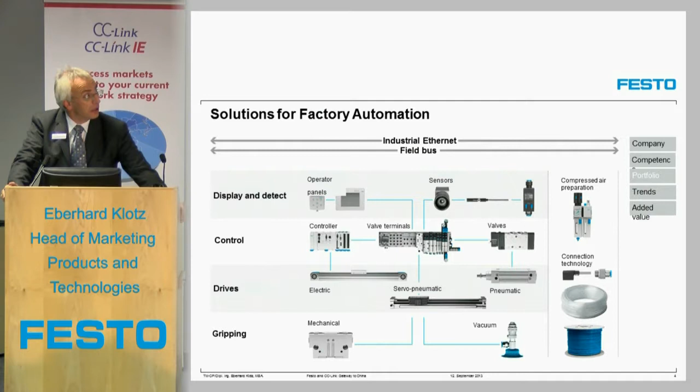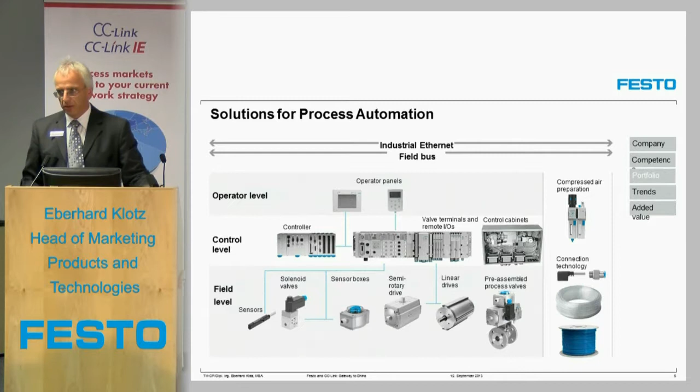This we do for factory automation, and since a couple of years we also establish this know-how for process automation. Then you have different sensors, you have different actuators in the field, of course, but the control equipment is similar at least, and in this case we also provide full cabinet solutions, for example, to our customers. This is the business environment of Festo of today.

I already mentioned we are a family-owned company, and if you are a family-owned company, some things are similar, some things can be different. One thing that is different is that a family-owned company has the capability to engage himself in a long-term perspective.

I come back to Lutz and his presentation, for Chinese people, it is interesting, a cooperation, a long-term oriented perspective in doing business with somebody you trust. You need time for developing trust, and therefore this being independent from shareholder value each quarter helps us to generate these relations with our customers, and it helps us also to do things different in marketing, for example in branding. We will see that later on.

You can catch that Festo is busy since 1925. We started the automation business in the 50s. We already started doing our first national and international companies those days. And today we are really the largest company in offering these mechatronic motion solution systems.

Now, how does the knowledge come to the customer, to the new markets? Of course, there are some things traditional, like trade fairs. We have info shows. We do presentations and workshops with the customers. We have several trucks and minivans where we go to the customer site and show them the solutions and try to pass on our know-how. So this is the part which might be similar in your countries and companies as well.

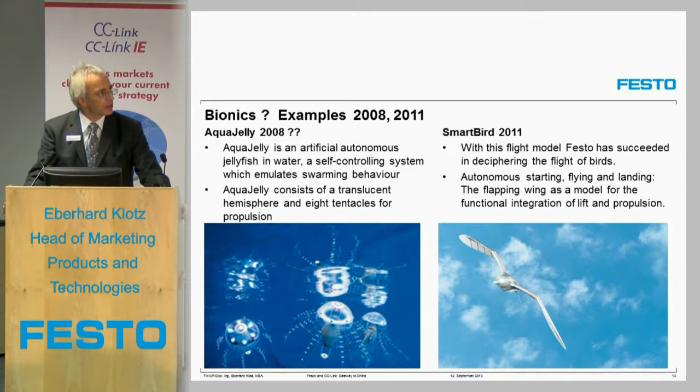A few years later with SmartBird, we tried to decipher the bird's flight. It was always a big obstacle to humans for over 100 years to get these wings moving and flapping so that it can really fly autonomously. It was always a mechanical problem. And we'd been able to analyze that and to solve that.

And then it was the appearance of the first autonomous bird robot flying. And I can show you a few things in one of the films, just to give you a little bit of an impression for those who have not seen it on our homepage so far or at one of the exhibitions.

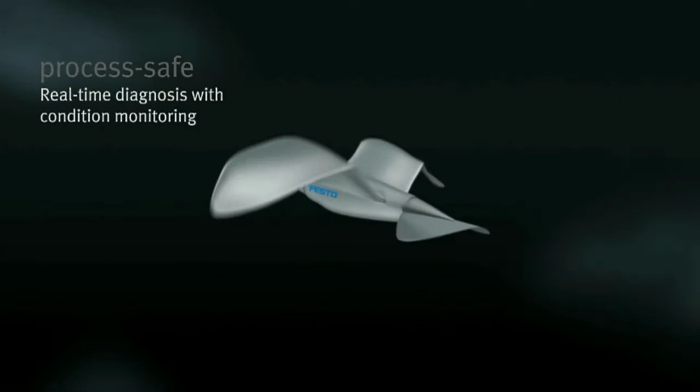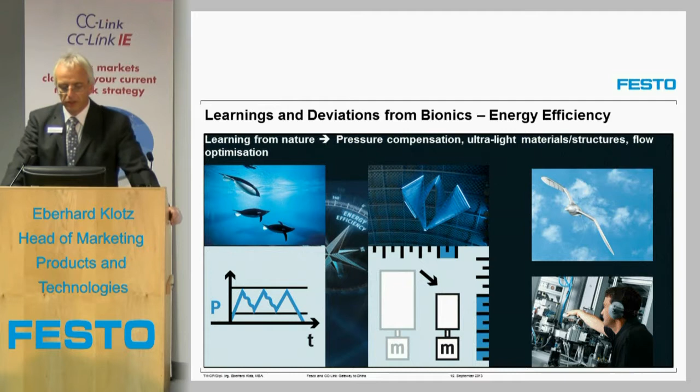Now the question is, after all the PR show outside, what are the learning lessons from nature in this case? I want to give you a few examples. I think energy efficiency is the most important headline overall, because saving weight, coming to lightweight structures, is important as soon as you want to have a flying model somewhere.

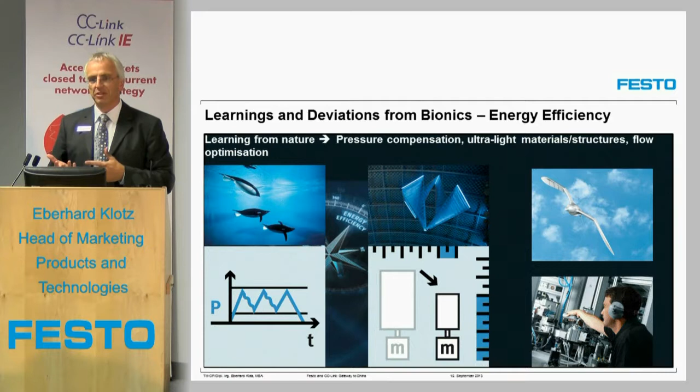But there are more learnings we can take from nature. For example, if fish or penguins go up and down inside the water, you need pressure compensation to balance 500 meters, 1000 meters, or even more in depth. This pressure compensation relates to our core business in pneumatics. If you want to build pressure regulating valves, you can take the same knowledge, the same precision mechanisms for regulators, and bring this into the products.

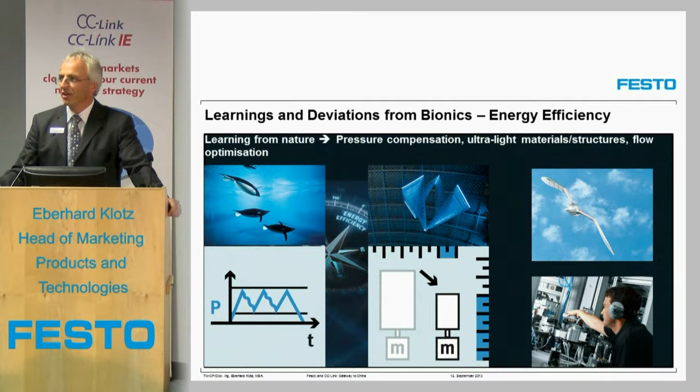The weight saving we already mentioned. If you build handling systems, you need energy to move them around. If you save weight there, it saves energy to the end users over the operating time of their handling systems. Flow optimization was really strongly needed with SmartBird to optimize the wings, bringing overall efficiency from beginning 30% to over 85% with the wing structure. We use the same knowledge to optimize valves inside. You don't see that from the outside, but from the inside I can show you later on.

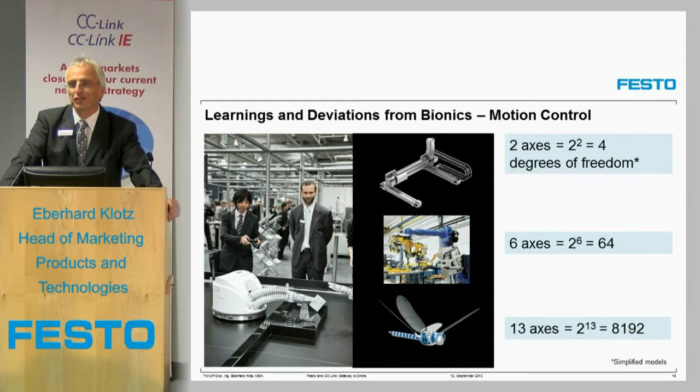I already mentioned the Dragonfly. If you take a typical handling system, an XY gantry, you have a maximum of 4 degrees of freedom, just as an easy formula to make it clear. If you take a robot with 6 axes, you already have to manage 64 potential sources of movement and make sure there's no conflict in the movement. The Dragonfly has 13 axes or motors inside, so you have to manage above 8,000, which gives you an indication of how complex motion control tasks in bionics, in nature, are, and how they're managed in a very professional way, and how complicated it is to build that into a chip or any PCB board to get that managed. It was also partly hardware related, similar to your approach inside the chip, and it's not all done by software.

Here you see the learnings from flow control. We have a virtual reality laboratory in our headquarters, and there we optimize the SmartBird, but we also optimize standard valves. We are able, for example, to improve flow rates of valves, even if they fit a standardized outside format, by up to 30%.

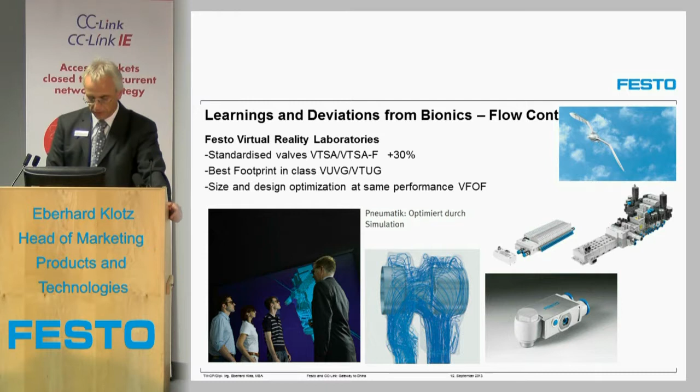Summarizing that, the learning steps usually are: take an example from nature, muscles, fins, or trunks. Try to figure out the basic technical principle behind it, and then try to adapt it, either to a bionic model or to an industrial application. The time delay between the first idea, the first derivation from nature, and an industrial product is very different.

From the bird's flight, I think we will not see any objects flying through the fabrication hall tomorrow, that early. But other things like the elephant trunk or these soft grippers, these fin grippers, are already standard products, the grippers in the Festo range. So in some areas we learn within 2 or 3 years and get that to an industrial product. In others, it's really a very early study program, and we still do not know when it applies in industrial reality. But anyway, it's fascinating.

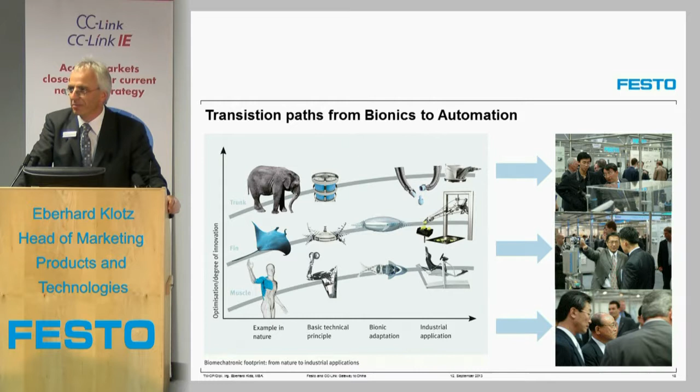And you will see it's fascinating in Europe, and it's also fascinating people in China. This is the message of the day. We have a second area where we invest money, and this is the so-called future concepts. Future concepts are much more related to technical needs. They use more everyday technical products inside, but they all have a vision we want to share. Over the last 2 years we made several very interesting projects.

The first one, on the upper right corner, is the so-called ExoHand. This is a glove with a robot hand on it, and you can wear this glove and control a robot. You can have interaction with the robot, and there's force feedback inside, so if the robot grips something, you feel in your hand, in your glove, the force of the robot. And if it touches a glass or a raw egg, you can say, okay, stop, stop, stop, it will break soon, it's my experience. The robot doesn't know, but it can learn together with you, and you transfer your knowledge just by this interaction of force feedback.

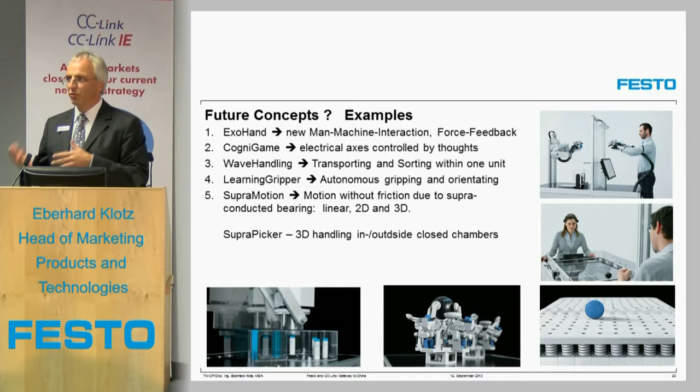One year later, we had the so-called CogniGame. This was the first time we used a brain-computer interface to control an electrical axis and to move it left and right.

An I/O platform which integrated control technology, in this case CODESYS, can be interlinked to any industrial protocol, for example CC-Link. Then you have one platform to operate electrical axis actuators, pneumatic or servo-pneumatic actuators, fluid muscles, and many others, to attach camera systems and vision systems, to modify complex automation tasks of today, but also future scenarios of tomorrow.

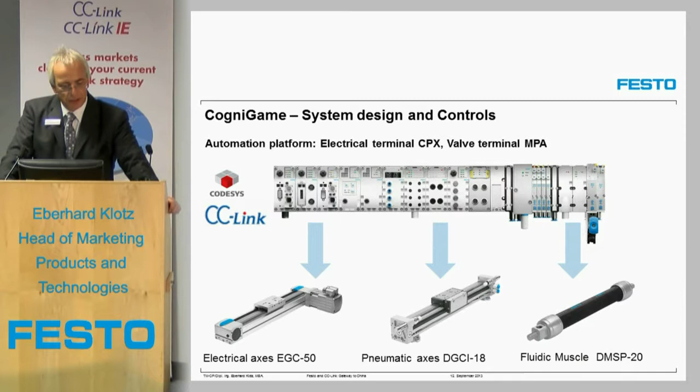What about the feedback? Now we're back to China. We took these future concepts and bionic objects, for example, to the PTC in Shanghai, and you see in the picture many Chinese visitors on the booth. When China was the partner country of Hannover Fair, we had Chinese ministers on our booth, and they had been highly impressed. So you see, qualitatively, it also works in China to create brand awareness with future concepts and bionic learning networks.

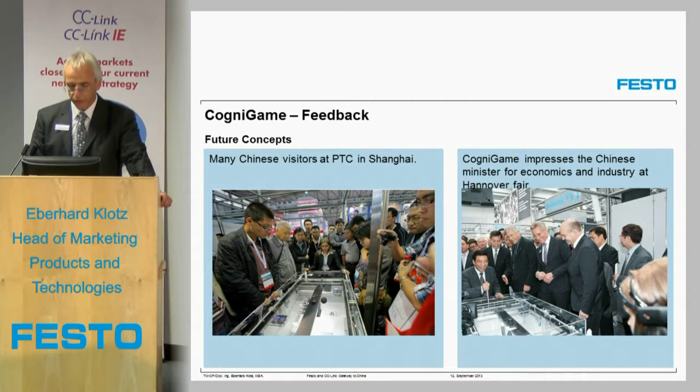You can also measure your success on the internet, for example with download statistics. The traffic increases by 100% as soon as we launch new bionic projects, sometimes 8 times if we have interesting projects online. On our YouTube channel, up to now, we already have 7 million visitors looking at these bionic films.

This is the bionic stuff.

Now coming back to CC-Link and our engagement with CC-Link in the Asian area. We started more than 10 years ago implementing CC-Link into some of our products. At the very beginning we used the easier products, the compact valve terminals, then continued with more complex and more expensive products. And this year we will start implementing version 2 of the CC-Link protocol into our products.

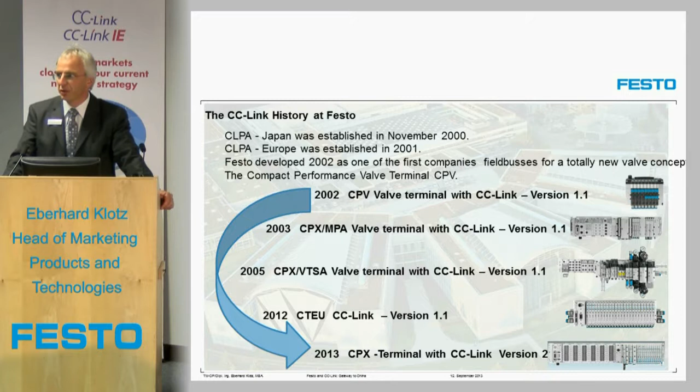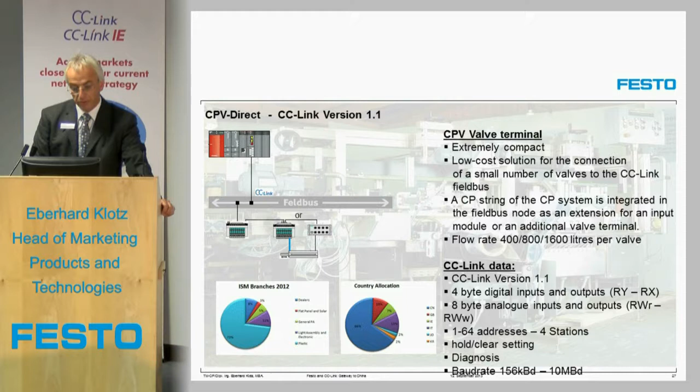If we compare these complex products, we see the Chinese market share is pretty low. Light blue indicates Korea, green is China, more or less 5%, at least in last year's figures. That indicates these installation-saving, complex products are not yet that attractive to Chinese companies, as labor is still relatively low there, so you can't argue saving labor costs that much.

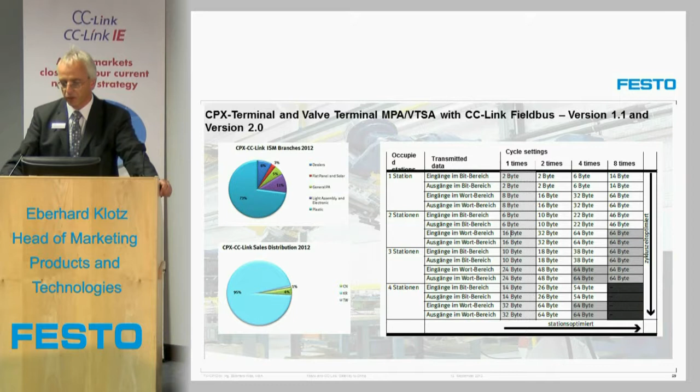It will change, as we heard this morning, at least in the Shanghai region. But outside the major cities, labor cost in China is still relatively low compared to Europe. So these complex products are not as beneficial to Chinese companies as to European-based companies. This is what we see in our sales figures and market shares: the easy, simple products do well, while the more complex ones need more time in China to find their customers.

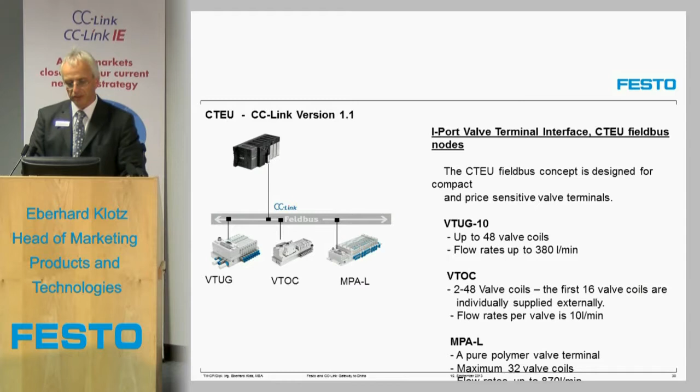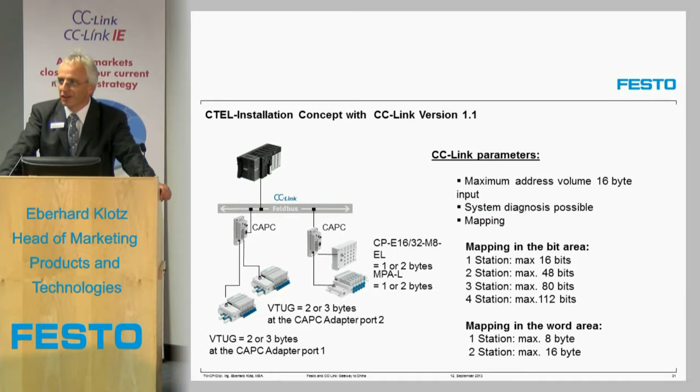We will develop new products, of course - we are doing that now. And therefore we think we can also help the CC-Link organization improve its worldwide presence, and we hope to benefit from your engagement in China and other Asian countries to be successful there.

So my summary is that local presence in China, for each country and each company, is important to be successful there, at least if you want to sell high-tech products which need long-term relations with customers. Brand awareness is important - it's not only a good product that sells on its own. You need good brand recognition, even outside of MRO business.

The way of using bionics can be really successfully leveraged in China, and the same applies to future concepts - these are nice ideas. The education program, we think, is also a core success factor for long-term successful relationships in China. Premium pricing, as I mentioned, is still a challenge, as well as protection of intellectual property. CC-Link is an important protocol there. So that's, for us, the final message.